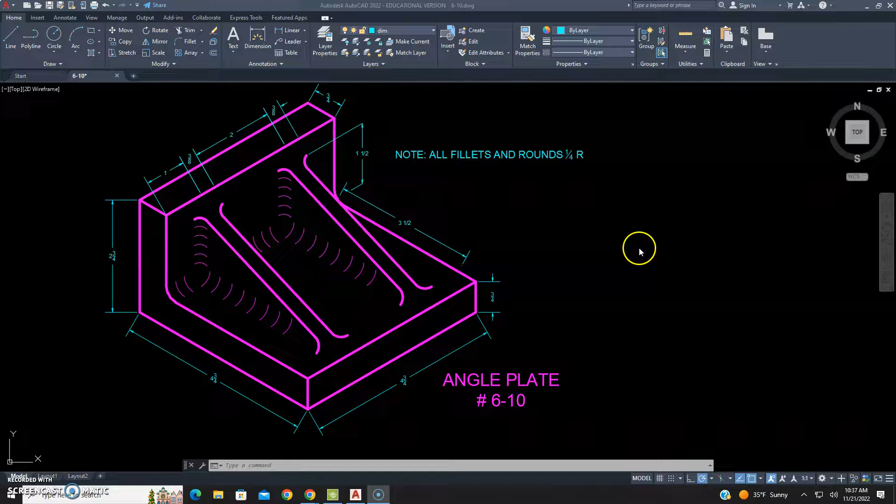Okay, today we're going to be drawing the angle plate in AutoCAD 2022.

Again, we're presented with an isometric view in our packet. Basic dimensions of the plate: 4 3/4 wide, 4 3/4 deep, so the base is 4 3/4 square, and the overall height is 2 3/4 total.

Then we have 2 ribs with corresponding fillets in the middle for support. Again, this type of thing is used for lining up jigs and fixtures and measurement.

So the actual critical surfaces are the outside surfaces. What's on the inside would typically be just rough cast and rough machined. Oh, and our plate thickness is 3/4 inch on both sides as well.

So let's start with what you could consider a front view here. Basically, it's the view that's going to give us the most information about the shape, which is kind of this L shape, and then a side view of our ribs.

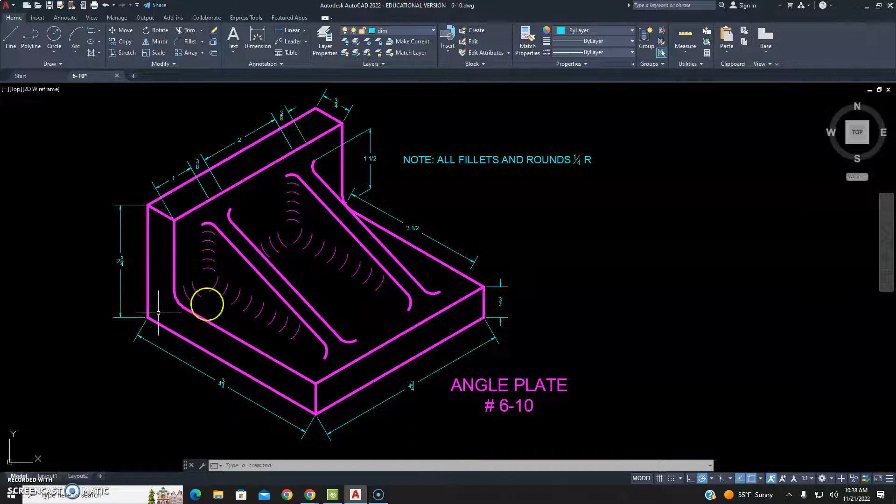So let's get started. We're going to draw an L that's 2 3/4 tall by 4 3/4 wide and 3/4 inch in height. And our rounded corners are 1/4 inch in radius.

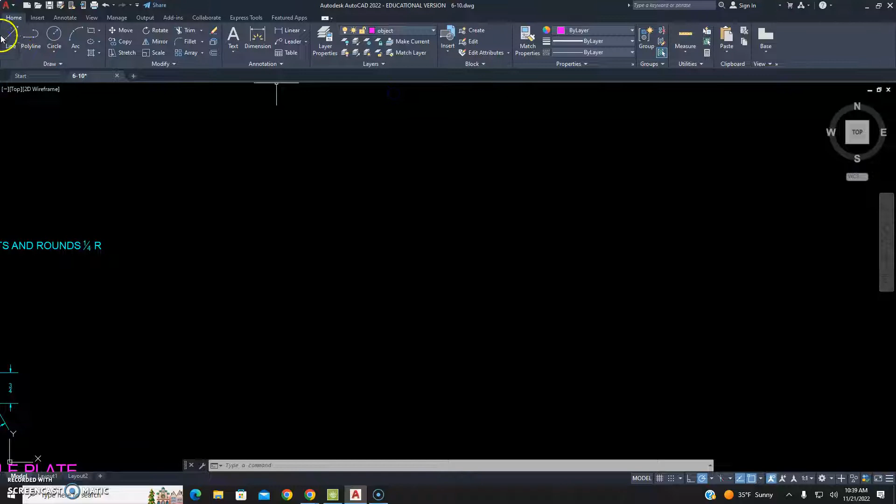So let's switch here. So object 2 3/4, 2.75. 4 3/4, 4.75, and then 3/4 inch. We'll just offset that.

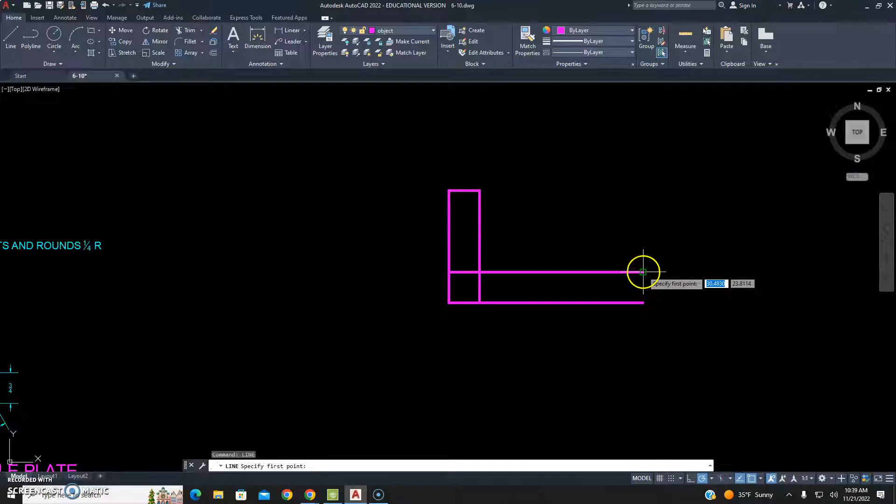So offset up, offset in, and we'll draw a line to connect. We'll come in with the trim tool and pull that out, and then we'll fillet the corner.

Actually, we'll leave that fillet for the end. It'll actually be easier to not have that yet.

So we've got to draw in our rib. Now, the side view of the rib is actually pretty straightforward because we can't see these fillets from this front view that we're drawing here from this direction.

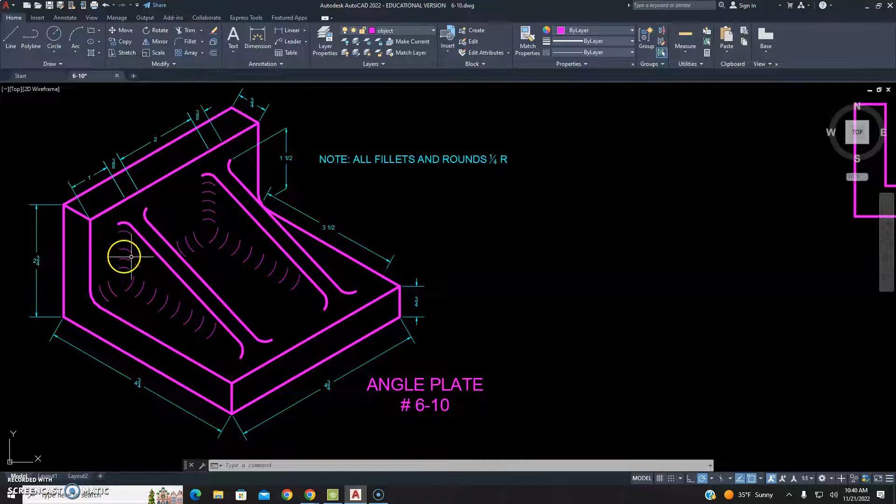So our rib is 1.5 inches up and then 3.5 inches out from the inside corner here, which is why I didn't do the fillet yet.

So we can offset 1.5 inches up, and we said 3.5 inches

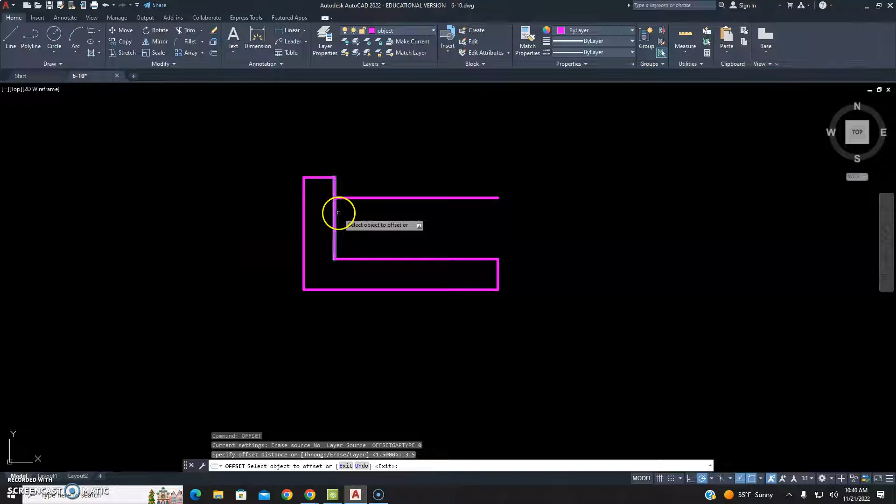out from here. Now those are just layout lines, so I'm going to draw in our rib, and we can remove those lines. And then the last thing we can do is do our fillet.

Fillet radius, remember we got to set our radius to 1/4 inch. It's already set to that, so we'll hit enter. Just click our 2 lines.

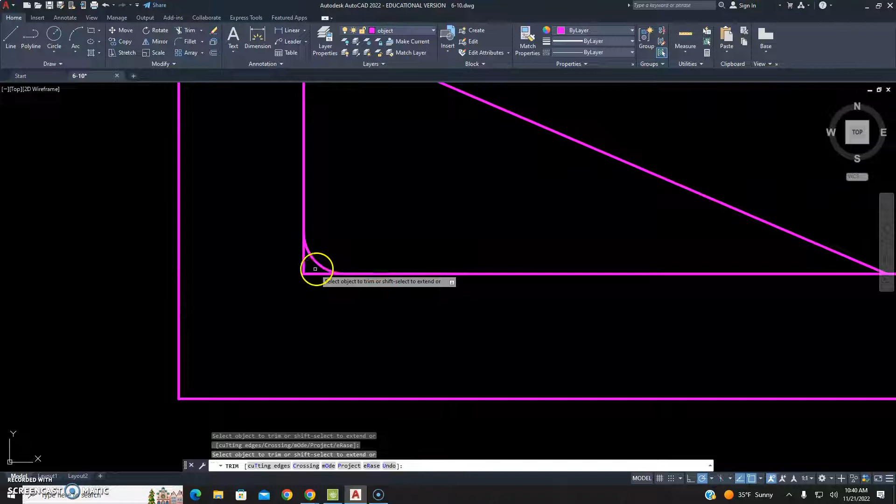I have trim turned off from a previous command, so mine's not trimming away, but yours should automatically. So that is our front view.

So let's draw a right side view where this thing is facing us. We're going to start with a rectangle this time, and in fact, I'm just going to use a

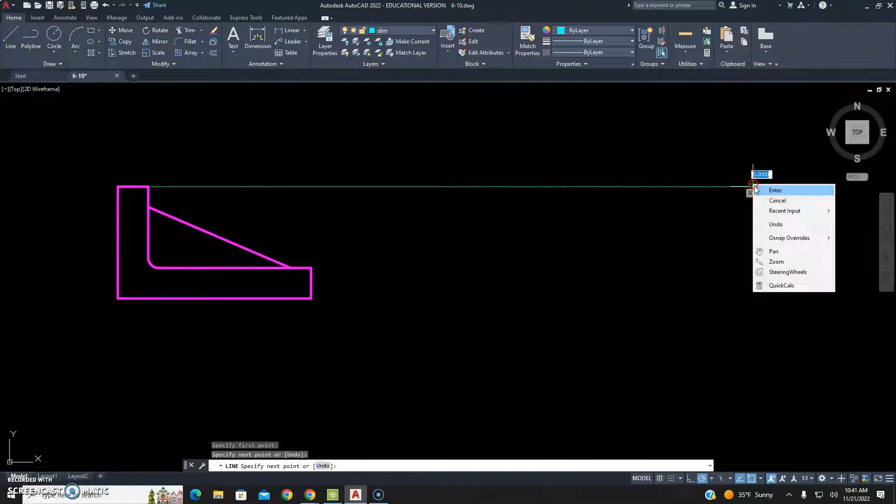construction layer to just project some things over here. And the last thing I want to project over is just the top of

the rib. And then we'll just start drawing in a line. So we'll draw this line right here. We're just going to offset that over 4 3/4, because again, that's the width of our plate here.

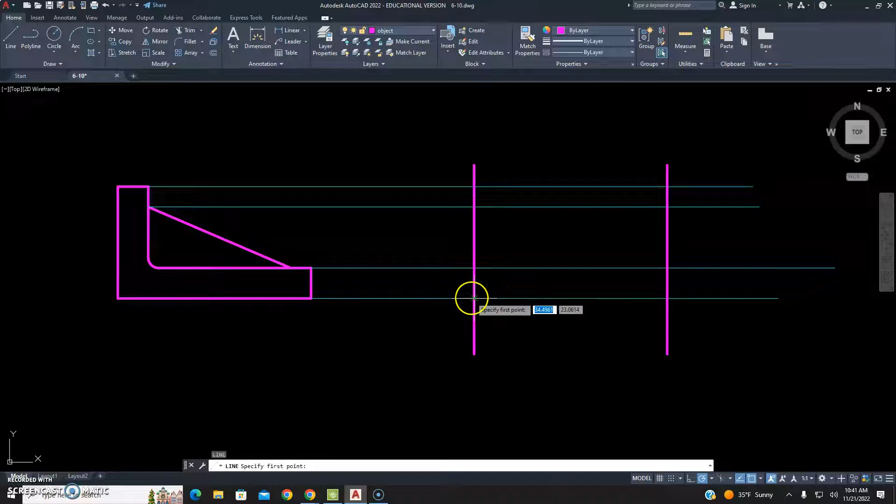And then we'll just start filling in our lines. We've got the bottom of the plate. We've got the shelf of the plate here. And then the top of our plate.

And then basically everything else is just the ribs, and we're going to come in with our trim tool here and just knock the top and the bottom off real quick.

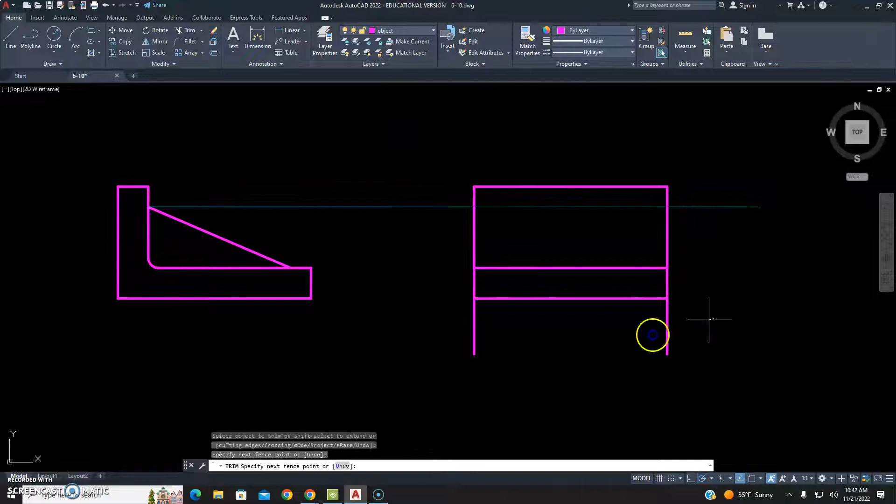Okay, so now we need to position our ribs. It's going to be really important to come back here and look at left to right, because now we're looking from this direction at our plate here. From left to right, where are our ribs positioned?

So looks like we're coming in 1 inch, and then the ribs themselves are 3/8 wide, and then we've got a 2 inch space and another 3/8.

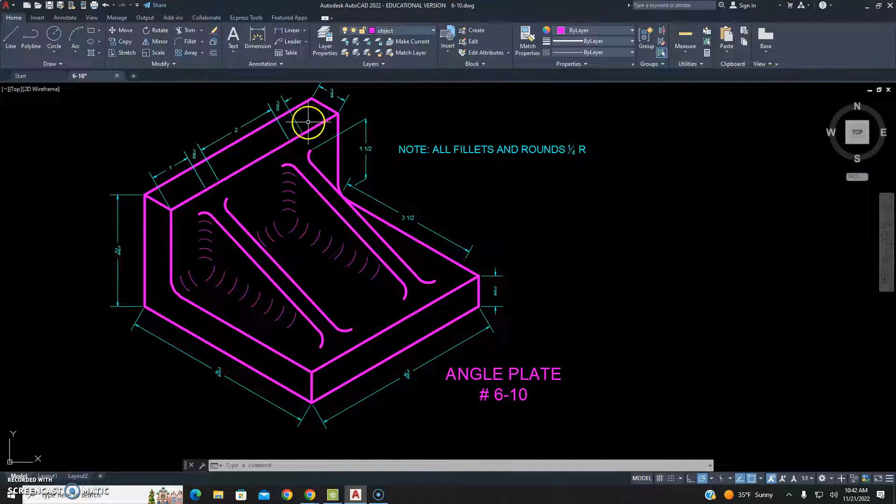And if we do our math on this to get 4 3/4, we realize that what's left is another 1 inch. So they're symmetrical. So we'll just use our offset and just start laying things out.

Offset 1 inch. So we'll bring this in 1 inch from both sides. We'll offset 3/8 of an inch to get our ribs.

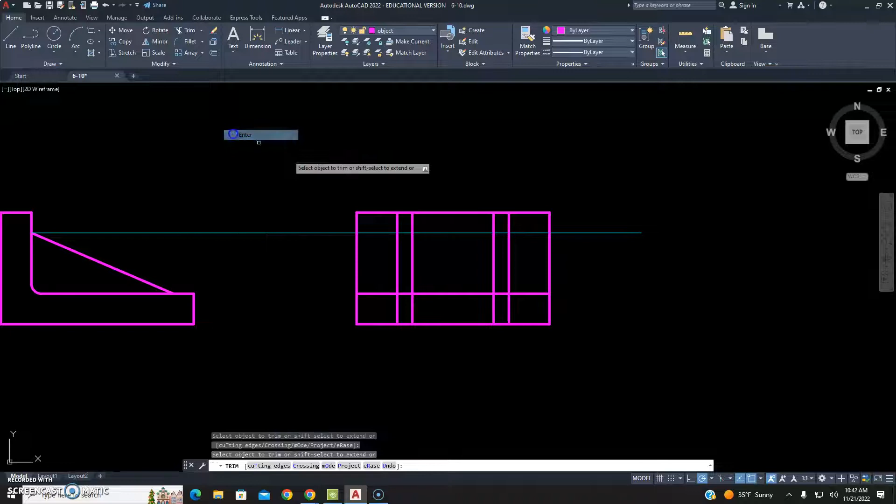Okay. Now we're just going to come in with our trim tool, and we'll take the tops off and the bottoms off. We can start to see that coming together now. Now we're going to leave this guideline here.

And then the other thing we're going to do is with fillet, we're going to type R for radius, 1/4 inch. And we also want to type T for trim.

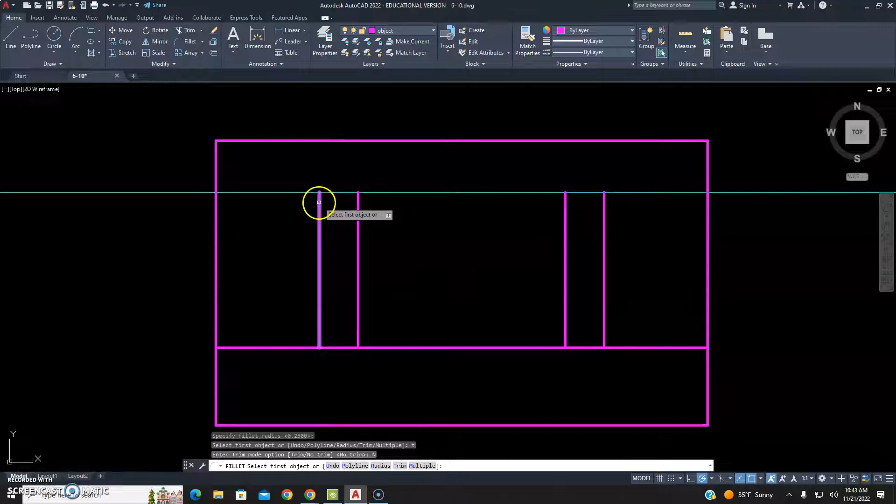Right now it's set to no trim, and that's actually exactly what we want, because we're going to fillet this, and we don't want to remove our guideline because we're going to need it for our other fillets too.

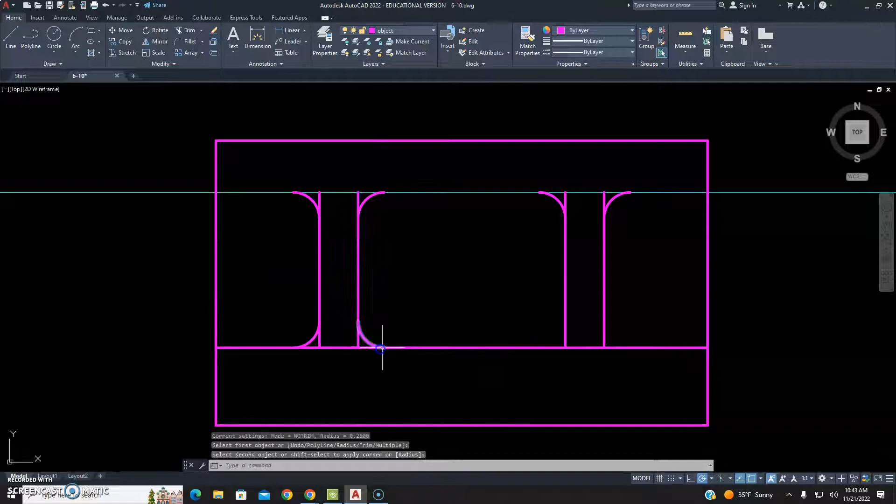It's much better to keep what's here and manually trim it out later, because otherwise I'll show you what happens. If I leave trim turned on, you see I lose that line, and now I have to redraw a line in order to have something to fillet.

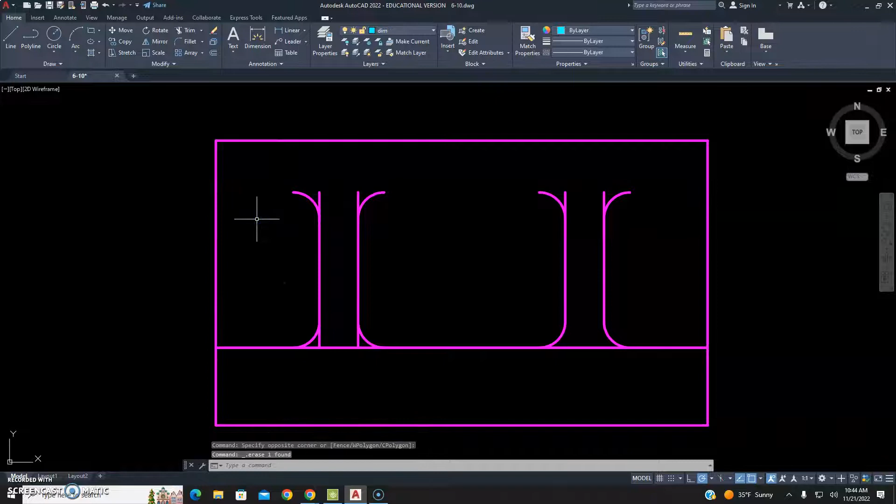In particular, this line, I need it. So we're just going to take this line and redraw that. And the top one, we can actually just remove that guideline. Now we can come in with trim, and we'll just trim off these little vertical tails here. That is essentially our right side view.

Some people like to do this as the front view. It's kind of a toss-up as to whether or not this is really the best for the front view. It really depends on what features you're trying to dimension precisely. These are the features that matter on this particular object, so they're in the right side view, but not they're contained in the front view.

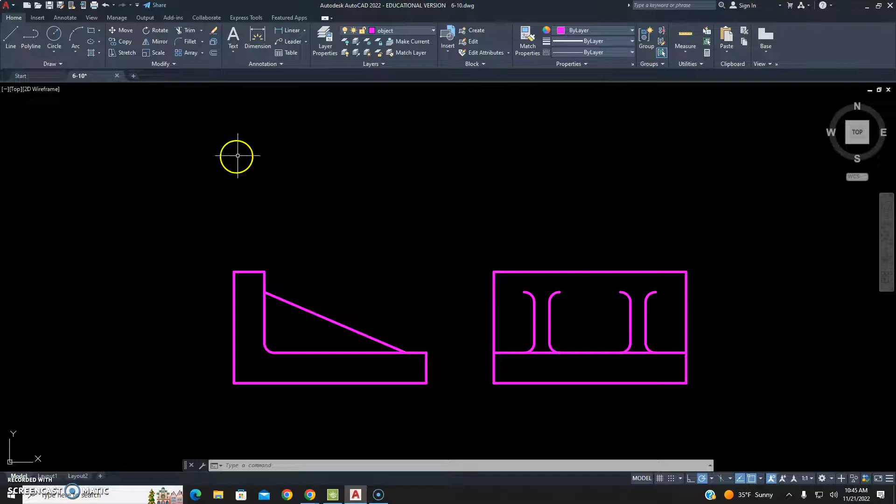So let's do our top-down view now. We're going to do that right here. This is a good opportunity for our reflection technique that I've shown you guys a little bit. So we're going to draw a line up and over from the left side of our right side view. And then at 45 degrees, we're going to draw another line.

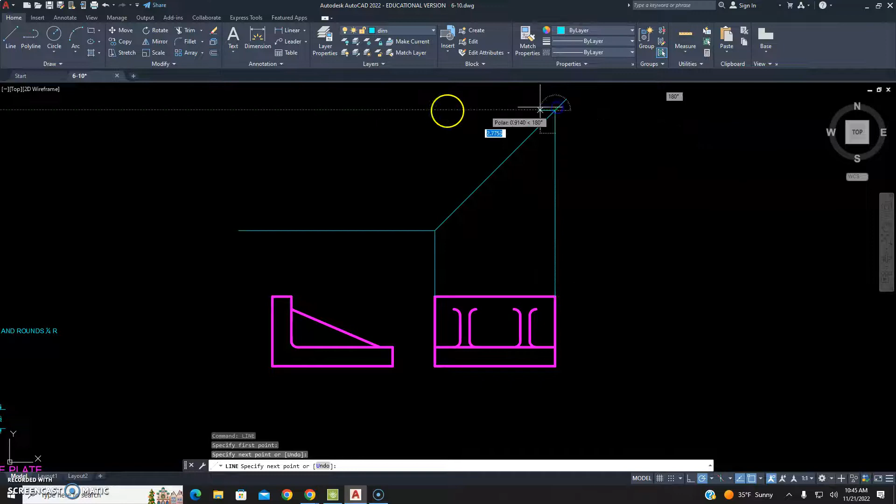And we can project this straight up and over. The reason why we're doing that is because it's going to make it a lot easier for us to show where the ribs go, among other things. We're just projecting everything up from our front view here.

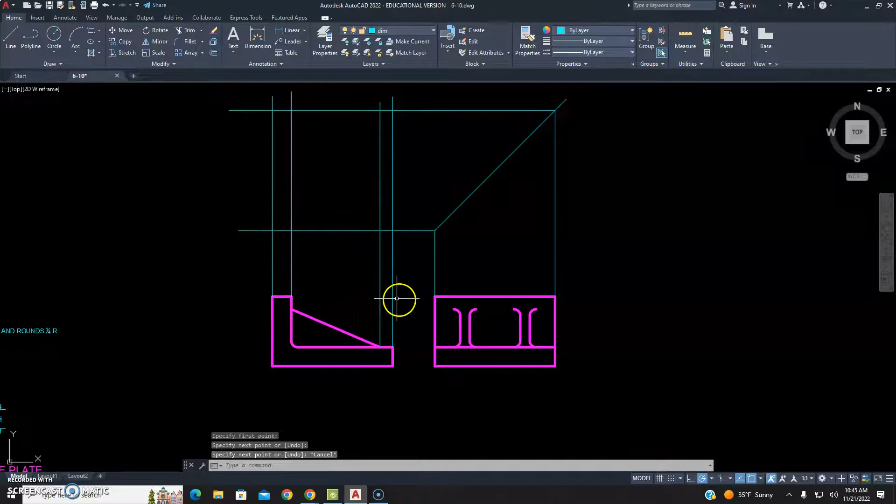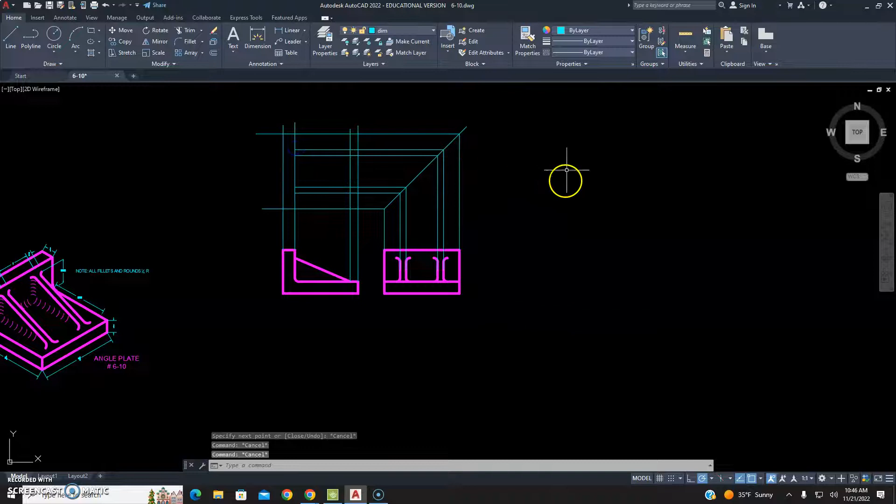And then we can project our ribs up and over too. So one up, one over. That doesn't even need to go that far. Do the same thing here, up and over. Obviously be careful of some of our other polar tracking as we do this. There we go. Alright, so let's start filling this view in here.

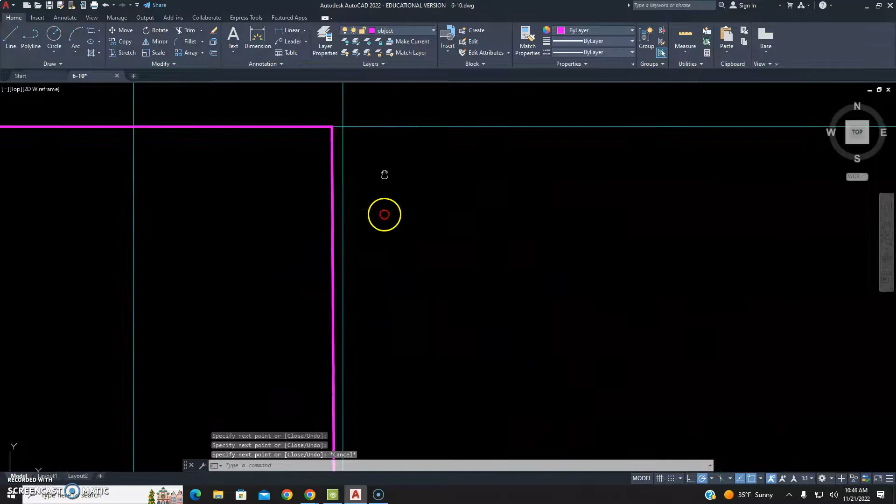So we'll go to Object, and then first things first, we'll get our rectangle squared away here. One thing, hopefully, you'll notice—I think I misdrew that. Yeah, I just happened to catch the midpoint there, so let's realign that, and we'll pull this line over too. I want everything to be connected up properly here.

One thing you'll notice as I draw this top view, I really don't have any numbers I have to put in because of this reflection technique being used. And I like to also delete lines as I draw them up top. That's also quite helpful. So now all that's left is our ribs.

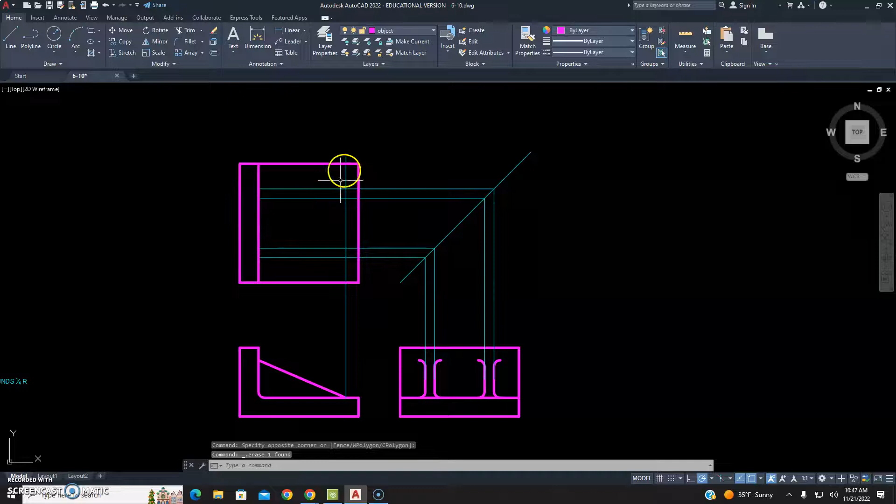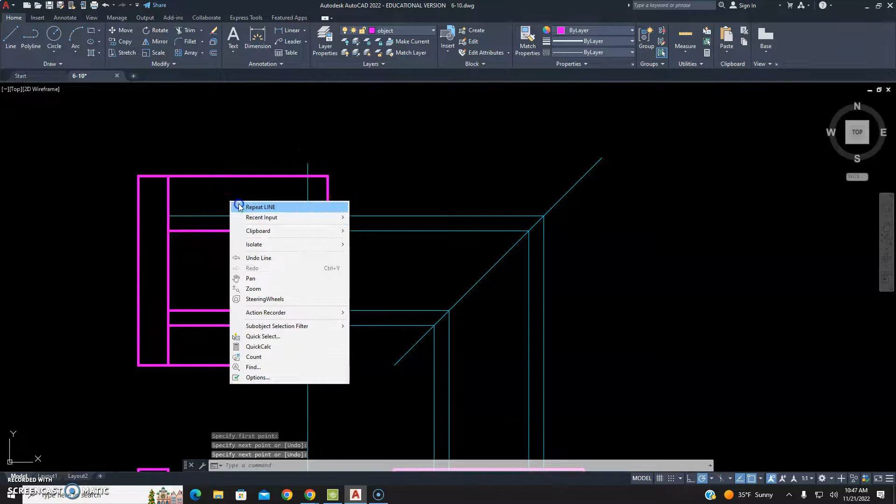What we're going to do is we'll draw in the straight lines of the ribs. We can remove those. And essentially now we can get rid of all of this stuff that's being projected. And now what I can do is copy these fillets. So we'll copy them.

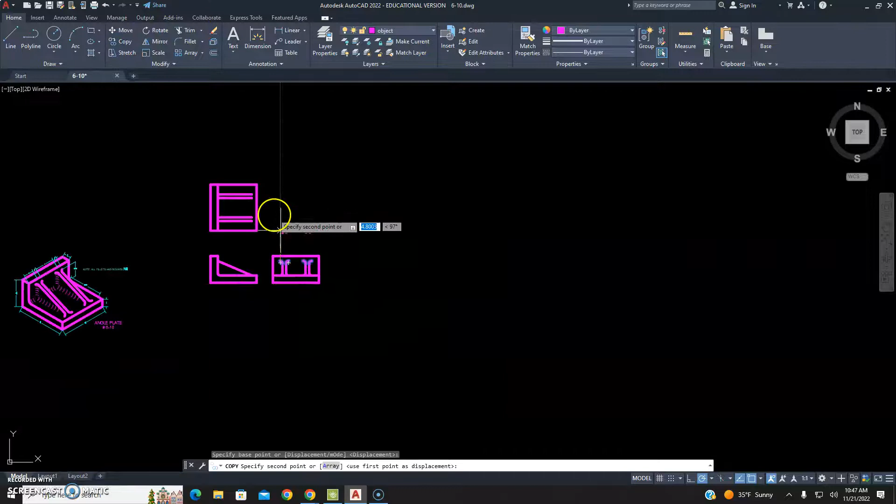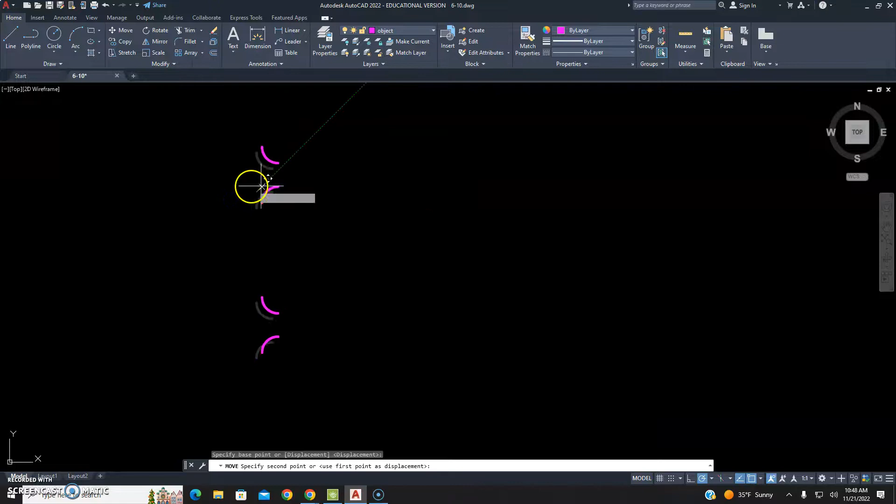We're just going to kind of bring them out here, and we will rotate them. Rotate, and we're just going to rotate them. It really doesn't matter, but 90 degrees. And we're going to move them. The question becomes, where are we moving? How are we moving them? If we bring that right here, we can move them like so into place.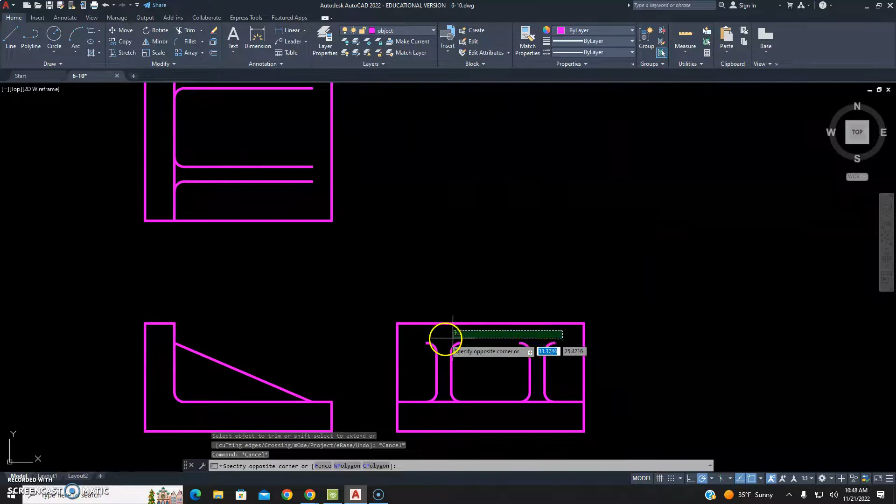And then come in with trim. Clean that up. And then we can grab these, get another set of these fillets. Same exact operation. Copy. Rotate. This time we'll rotate them in the other direction, so they're set up to be for the bottom.

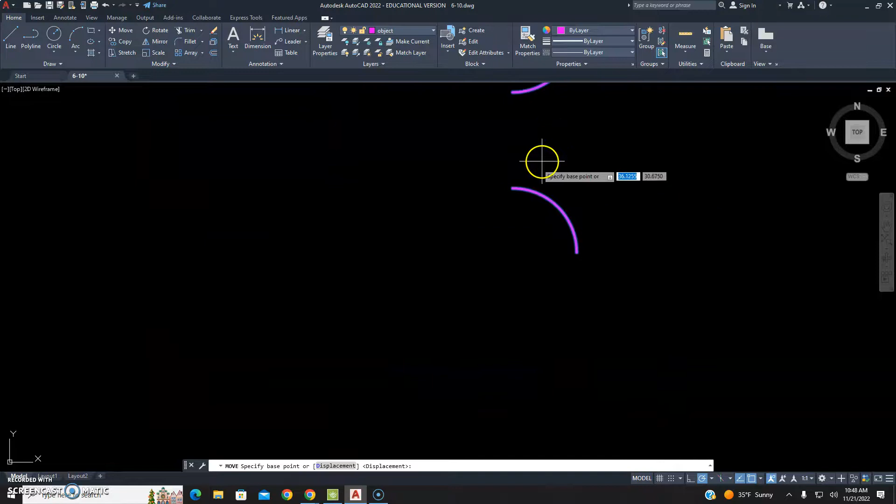And we can grab them with move, and again specify base point. If I hover here and hover here, I get a marker and I can find the intersection of those two. So now I can pop them right there. And we can just come in here and trim off the little tails of our ribs.

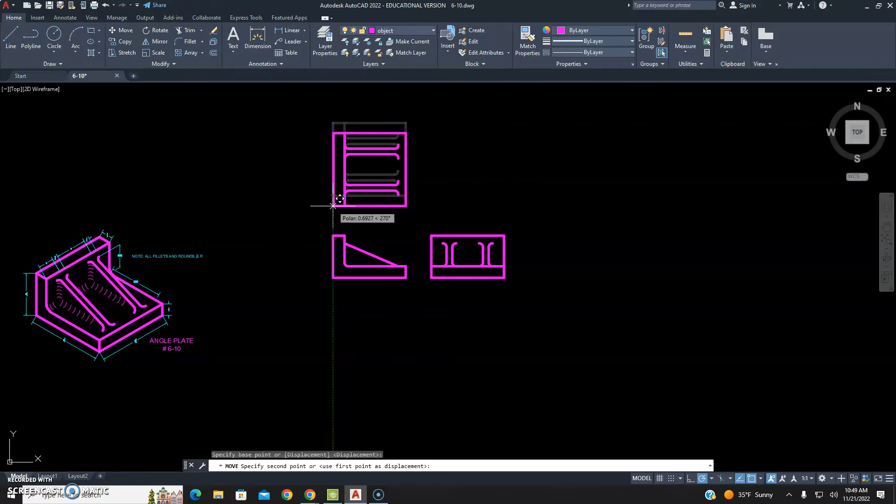And now we can just move that view into place. And there we have it. Our angle plate is complete. Again, no hidden lines on this one, so again, pretty straightforward, easy to draw.